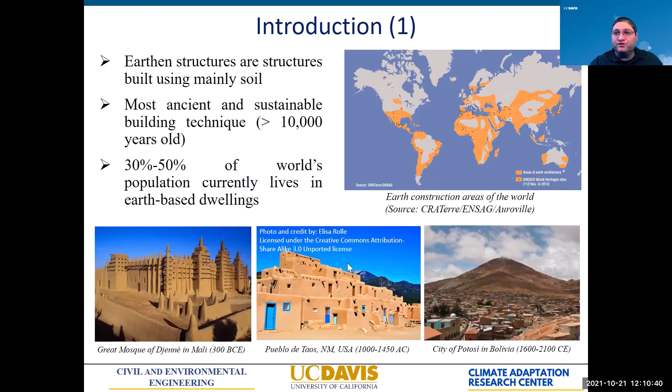Visible. I guess you didn't miss a lot, there were just a lot of words before, so I'll start from here. These are some examples of relevant historical places that are built with earthen construction. Even now, it is estimated that about 30 to 50% of the world population lives in earth-based dwellings. The difference between these type of structures and what we are trying to do is that we are using engineering principles to design these structures according to safety requirements that are typical of modern construction and design codes.

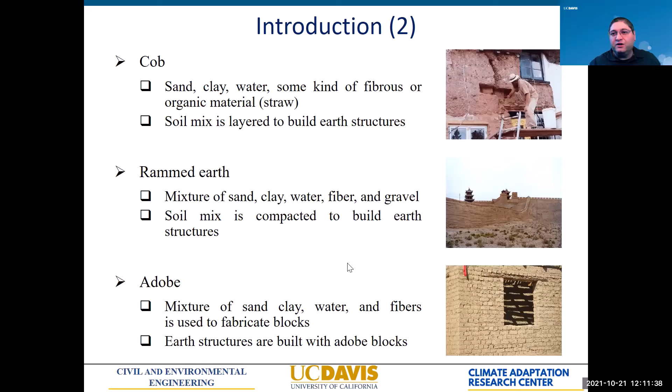So there are three main technologies in earthen construction. One is cob, also called monolithic adobe. This is when soil is mixed with fibers, usually natural fibers like straw, and water, and then it is layered in order to build these walls. Rammed earth is a different flavor where the material is put between containers and then rammed into the right consistency from the outside. And then adobe, which really includes any type of brick construction, is when sand, clay, and water are used to make blocks that then are put together using masonry type construction technologies.

So why are we looking at this very old technology for a problem that is very modern? The major reason is this is a material that is affordable, locally appropriate, and widely available. I'm not going to enter too much into the details, but with the right proportion of sand, silt, and clay, which are the main components, it's possible to use this material for construction purposes almost everywhere. And if we use a chemical stabilizer, generally cement or lime, we can expand even more where this material can be found and used for construction.

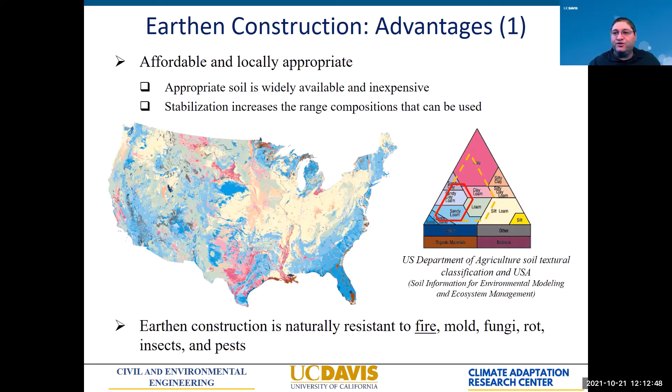In addition, soil and earthen construction are naturally resistant to fire, to mold, to rot, insects, pests, termites. So it's a very durable type of material. It is also healthy and natural. It has the property of maintaining naturally the indoor humidity within the goal of 40 to 60%, which is considered the optimal range for human health.

It does not produce any volatile organic compounds that could be dangerous for health. And it is eco-efficient and sustainable, both from the point of view of operational energy, as it can reduce costs in heating and cooling by 30 to 70%, depending on the climate, and from the point of view of embodied energy, as not being affected by any firing, it uses very little energy.

I see a hand up, Anna. Yeah, I was just curious, obviously I'm sitting in Tahoe City, California, where the snow load is the critical factor for engineering structures up here. I'm just wondering if you're going to talk about the engineering, and whether this is really something that, for my area, is actually realistic.

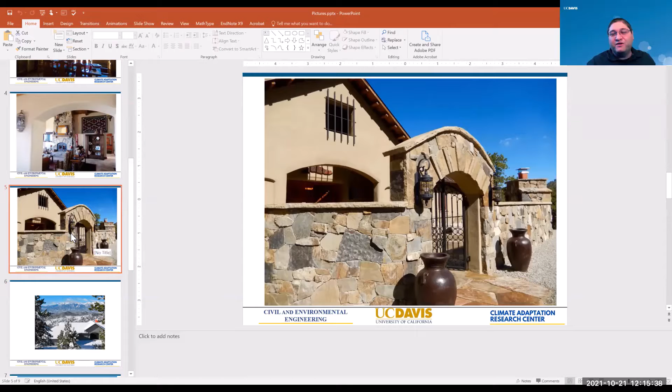So yes, if you design it correctly, like in this case, you can use these houses. It's another point that I wanted to make: this is now a pretty high level house, relatively expensive. But the work that we are doing is to really make it possible for everybody to use these houses.

Going a little bit back to what I wanted to present: one of the issues with earthen construction is that it is used for very high level mansions, of the order of a few million dollars. An example is the house that Will Smith has in Calabasas, a multi-million-dollar mansion made of adobe. And then it is used for very low income or no income people, for example, in Haiti.

But even here in the United States, I'm collaborating with a program for people that are homeless, designed to provide tiny homes to homeless people and create a virtuous circle of new economy, with people that get the house, then start working, and then start producing for the economy.

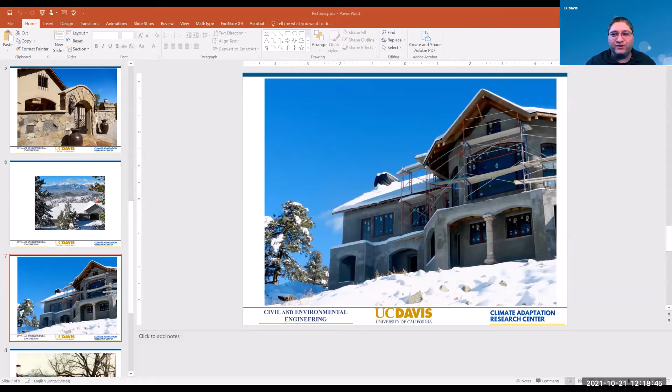Anna, does that respond to your question? Thank you, I think it does.

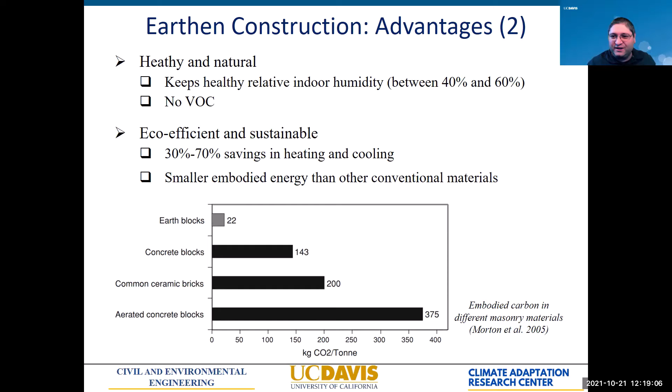So I'm going back to the presentation, but please feel free to stop me anytime. And if we go beyond, and there is something that I cannot present because of time limit, it's not a problem.

Another advantage of earthen construction is that, once properly designed, we have proved it can provide good resistance to hurricanes, tornadoes, and earthquakes. And now we are investigating the performance under wildfires, which I will address toward the end of my presentation.

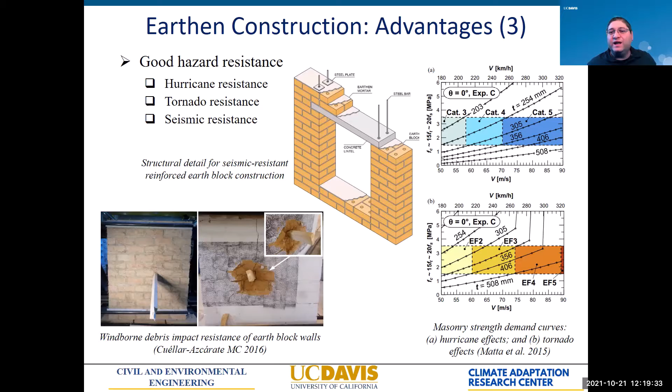So there are also challenges that we have to resolve when designing with these. One of the challenges is that soil is a natural material and thus has a higher variability in terms of properties than other industrial materials. That's something that needs to be taken into account.

It has generally poor durability against wet climates if nothing is done to remove that. Here you can see a test that was run on a rammed earth wall that was exposed to an accelerated test of

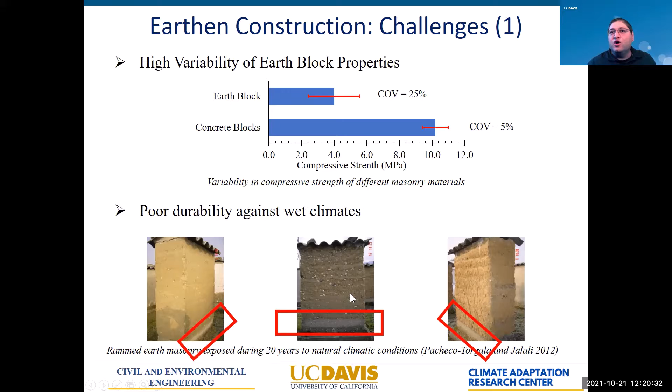wetting and drying cycles where there is some damage at the base of the wall. Another issue is that the material by itself is brittle, which means that when you load it, it reaches its maximum strength and then it breaks in a fragile manner, similar to concrete in a certain way, or to rocks, or a piece of chalk that seems like it's not deforming until it breaks completely.

It is also labor intensive, and this usually brings up the cost in places where labor is more expensive.

I see there is a question in the chat from Ian: can you give examples of California jurisdictions that have building standards specifically adopted for earthen construction?

This is really relative to building codes. The earthen construction codes that exist right now are the New Mexico building code—I believe title 14 of the New Mexico administrative code, which is for building earthen construction. Then there is chapter 21, section 2109 of the International Building Code 2019, which has been adopted by the California Building Code. So if you look at the California Building Code, section 2109 is on adobe constructions.

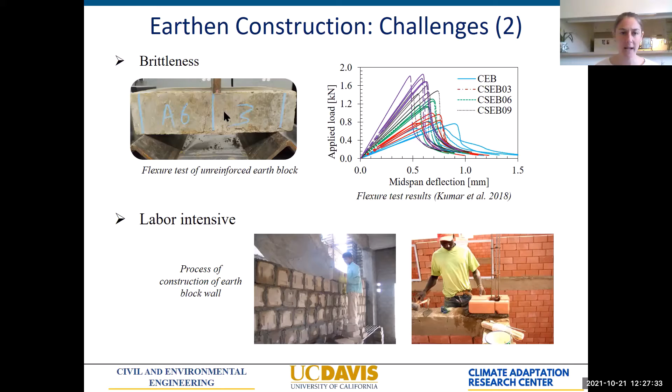Let me continue with the challenges. We have a lack of engineering-based design codes. All that's available is the New Mexico Administrative Code, the International Building Code's Empirical Design provisions, and the International Residential Code. We need education among engineers and architects, which I already went through.

There is also another problem: the widespread perception that this is a substandard choice due to poor performance of non-engineered earthen structures in other places in the world. I'm thinking particularly of things that happened less than 10 years ago in places like Turkey, where after a strong earthquake, more than 10,000 earthen houses had very bad performance.

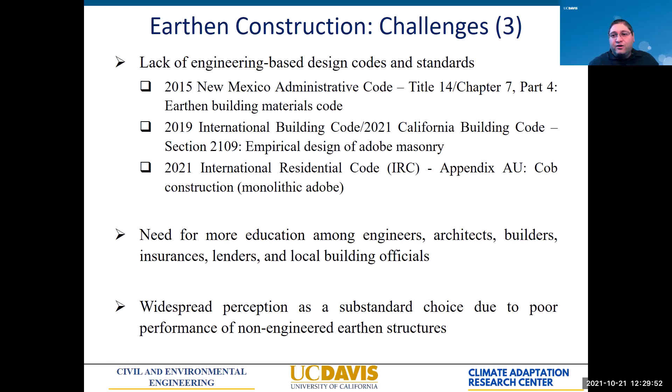Our work is developing the engineering knowledge needed so that we can design these structures like all other more modern materials. And when that is done, you obtain very nice, beautiful looking, but also very resistant and safe structures.

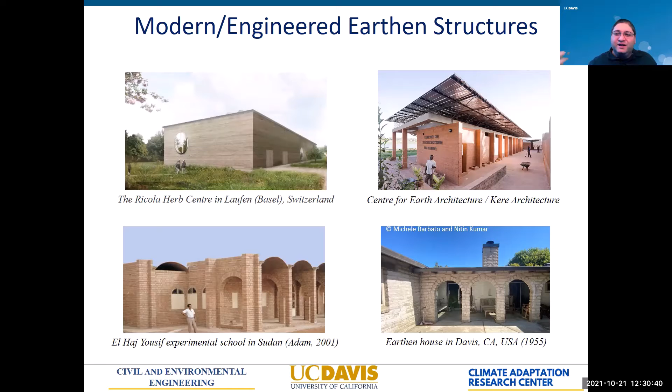These are examples coming from Switzerland, from Africa. Here, I visited just a few months ago a beautiful earthen house built in Southern Davis in 1955—a house you would never guess is 70 years old because it's in very good structural condition. So it is feasible, it is possible, but we are not doing it for all of the other ancillary reasons behind it.

I want to focus now more on our type of construction, the earth block, using blocks made with soil. I won't go into the different details, but the one we are investigating is called compressed and stabilized earth blocks, because we add a chemical stabilizer like lime or cement, then compress them mechanically to build the blocks and achieve better strength and durability.

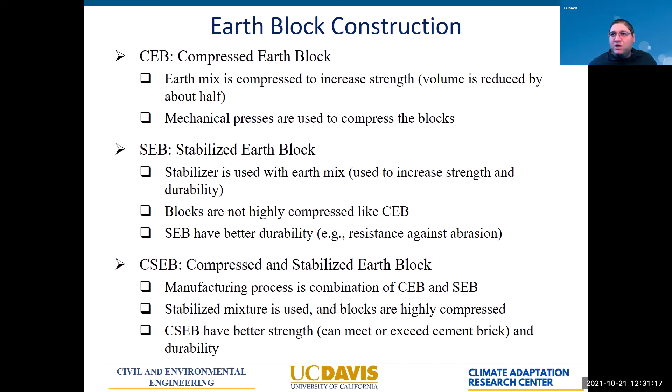These are types of blocks we can build with different molds. This is an example of our students making one of these blocks with a machine we built ourselves in the lab when we started this type of research.

While you can see this is quite laborious, we just bought a hydraulic machine that does this in a much easier manner. All we need to do is load the soil into the cart, and the cart automatically sends it into the machine at the right speed—we can produce about 300 blocks per hour with a crew of 3 people using this machine.

So much faster, much easier, much quicker.

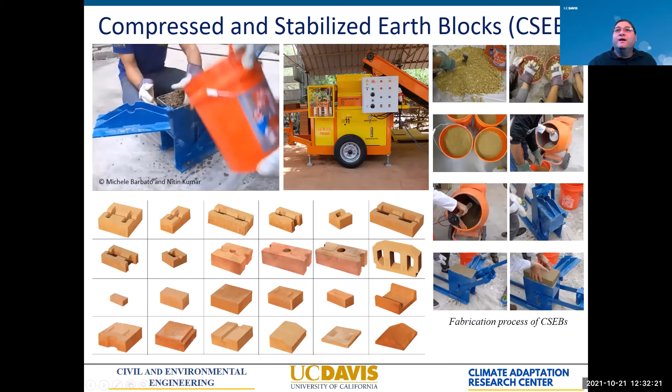Now some studies on feasibility that will also connect with the question posed about costs. We investigated the feasibility of this type of structure in Louisiana, where we looked at affordable hurricane-resistant housing for people living in temporary houses, displaced by hurricanes, or living in trailer homes. More than 350,000 households in Louisiana were in need of affordable housing after Hurricane Katrina, and we were trying to find a solution for that.

In addition, in Louisiana we had a lot of different challenges: poor soil quality that needs amelioration and stabilization, hot and wet weather which produces durability problems, and strong wind loads coming from hurricanes. All of that needed to be addressed in a very cost-effective way, otherwise it could not be used.

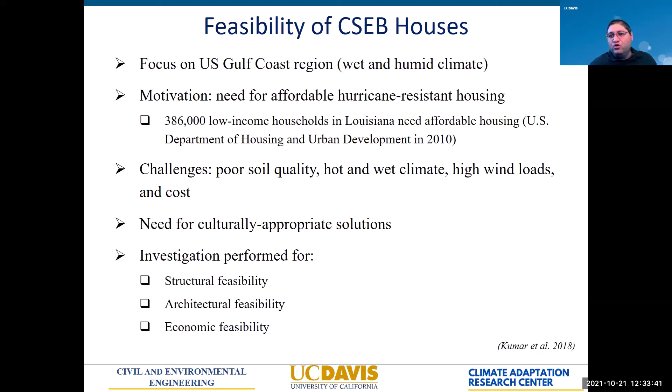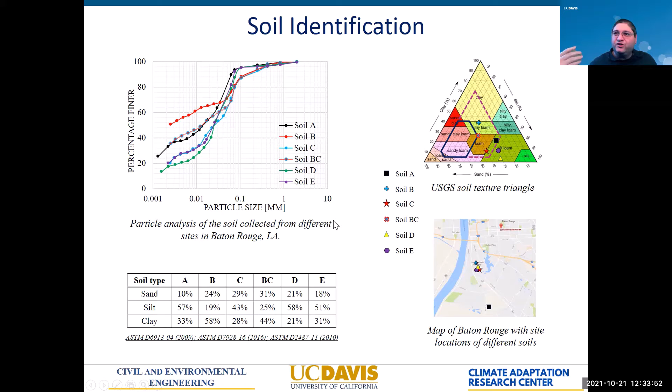We investigated the problem from a structural point of view, an architectural point of view, and an economic point of view. I won't go into all the details, but we took soil available around the LSU campus, normal soil, and investigated the mechanical properties in terms of compression and flexure to identify the amount of cement needed for appropriate strength for construction.

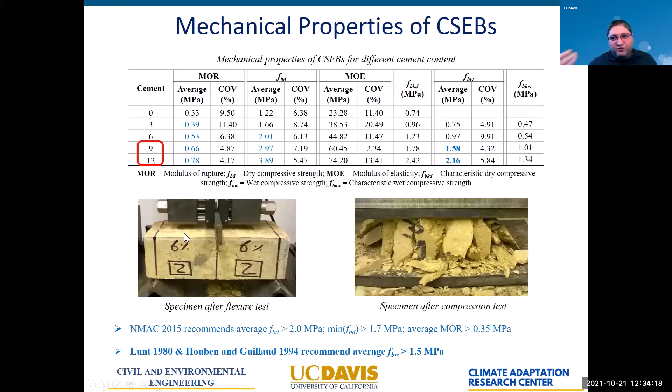We found that we needed between 9 and 12% addition of cement for that specific soil we were using.

We wanted to address immediately the problem of durability, because in Louisiana this type of construction is not being used a lot, since water and rain tend to wash out soil. So we did an investigation with a wall left outside the campus for 6 months, where we protected half of the wall using a stucco made with soil and cement at the same 6% composition we're using for the blocks. As expected, the side left without protection from the water during those 6 months—during which, by the way, 2 tropical storms passed through Baton Rouge—started having a severe problem after just a few months, because the mortar is washed away by the rain.

But the other side doesn't show any problem. Not only that, but after this test we demolished the wall, took all of the bricks, and tested them again. We found that on the side that was protected, the bricks were getting stronger and stronger, because the hydration of the cement was continuing due to the presence of all that water. So the structure was actually becoming stronger with time, not weaker, unlike on the unprotected side.

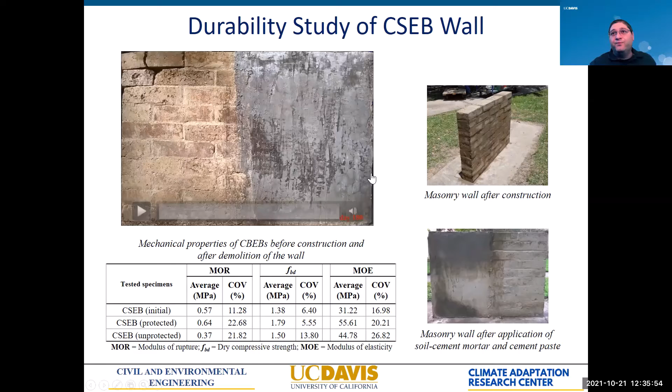We did our engineering analysis to find the design needed to take the wind loads required by ASCE 7, the code used for design of structures. Very quickly, the design was done by developing these curves—the intersection of these curves with the vertical curves gives us the thickness of the wall needed to provide sufficient strength against hurricane winds. We were able to do it with our blocks at 30 centimeters thickness, even in places expected to have very high wind speeds.

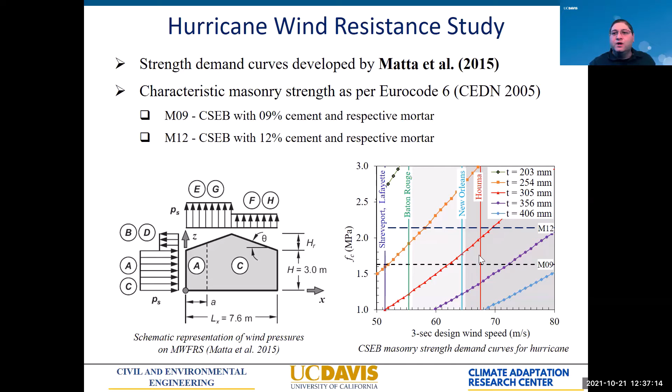I apologize if everything is in international units, because that's what publications want for the data. But we're talking about 12 inch thickness walls for Hurricane 5 resistance without the need of reinforcement. And with reinforcement, we can bring that thickness down to between 8 and 10 inches.

We also tested these materials against windborne debris impact. As you can see, the 2x4 tested with the wind cannon goes through it like a hot knife through butter, leaving this very scary hole in the wall.

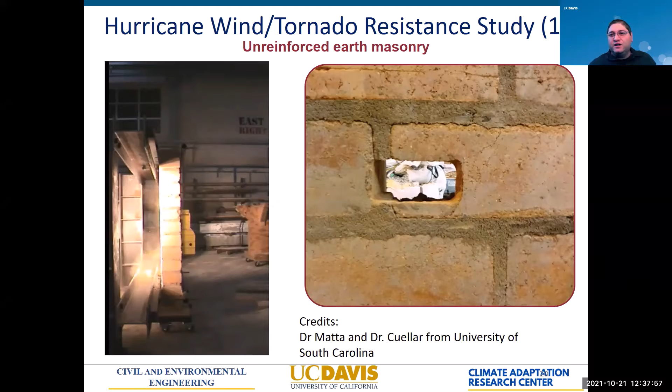So what we did was add fibers, specifically recycled plastic fibers obtained by shredding plastic bottles, into the composition. So the wall is able to stop the missile—not only that, but the impact is still so strong that the missile breaks without penetrating the wall. Again, there is a technical problem, but we can find a technical solution to it.

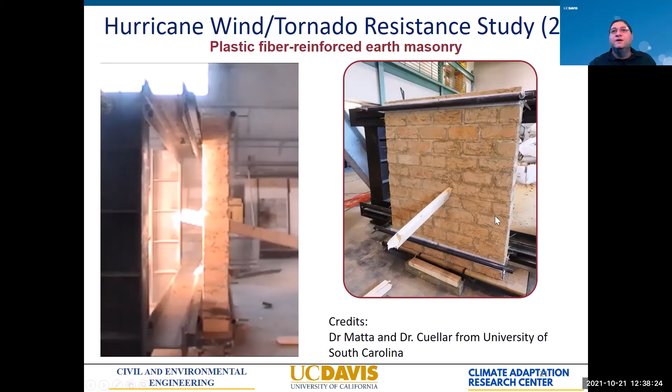This is the slide relative to economic feasibility. In order to reduce the amount of labor needed, we have a big advantage in terms of material cost, because the material is fundamentally free—it's the soil that we have under our feet. The idea is you want to use that, minimize the amount of transportation, and minimize the amount of other things that need to be used.

This is also great considering what happened with the disruption of the timber supply chains lately, where the cost of timber skyrocketed for almost a year, blocking a lot of new constructions. This soil is locally available, it's natural, so there's no disruption of supply chains that will change the cost of the material. We did this analysis with the cost of labor in Louisiana, and we were able to develop a construction technique based on mortarless interlocking compressed and stabilized earth blocks that reduces the amount of labor almost by a factor of 2.

Under these new parameters, we were actually able to design a house whose cost would be lower than the cost of an equivalent approximately 1,000 square foot house in southern Louisiana, which responds to part of the question about overall cost that Anna was posing.

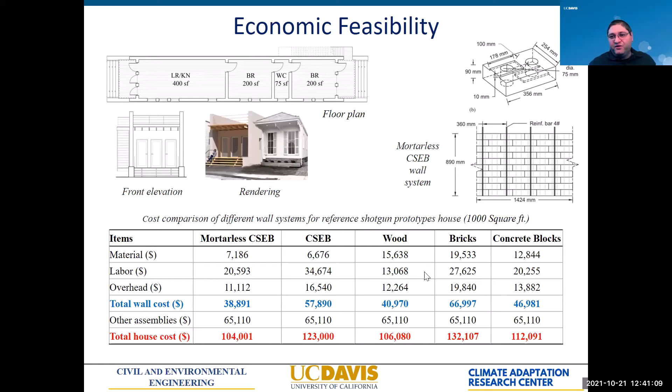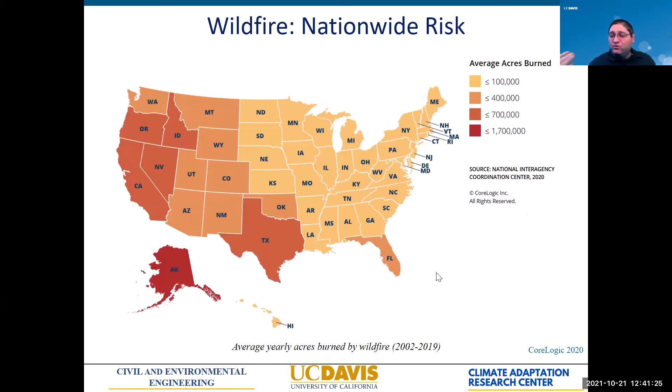As I promised at the beginning, I want to talk about wildfire. I don't need to discuss too much about how dangerous and how much risk we associate with wildfires. We can see what is happening in California. The number of structures damaged or destroyed by wildfire is increasing, I would say, exponentially. The number of confirmed loss of life is extremely well correlated, unfortunately, with the loss of houses, much more correlated than with the acres burned of a wildfire.

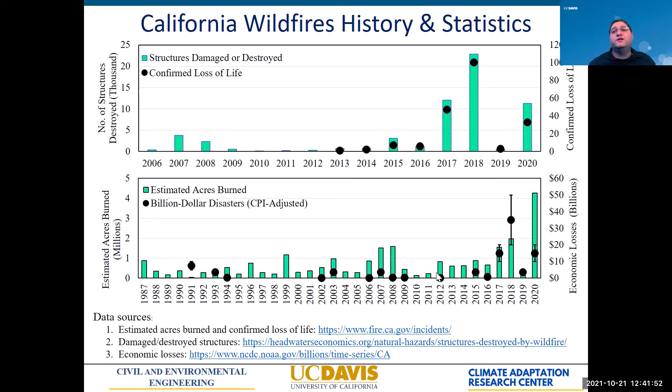The issue is that we are having a double whammy in terms of wildfires. On one side, the hazard is increasing because of climate change—drier seasons, longer wildfire seasons, higher hazard connected with large wildfires. And we are also increasing our vulnerability because we are building more in the wildland urban interface. So your risk is really increasing due to the hazard and the vulnerability, and risk is the product of the two. So we need to do something about it.

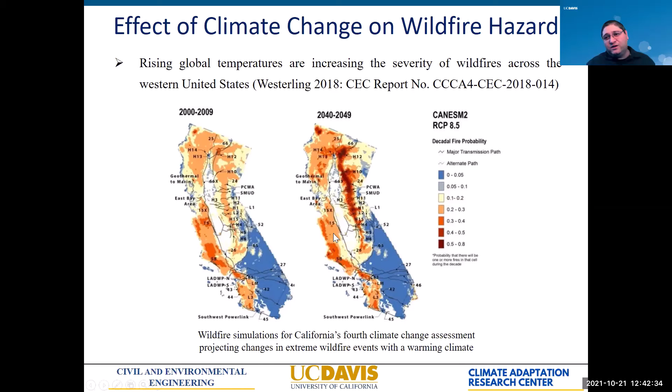What we are doing right now is developing standards that make structures ignition resistant, meaning it's difficult for a structure to start burning. Everybody considers the cost of a fireproof or fire-resistant house too high to be taken, and that's assuming the only solution is building a house made of concrete or concrete blocks. But using soil, we can actually bring down the cost so that the two costs are comparable.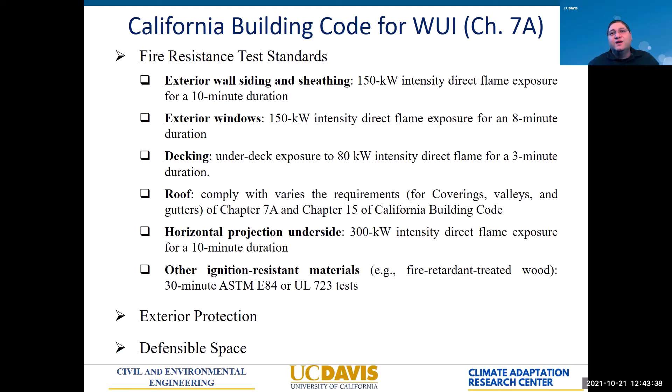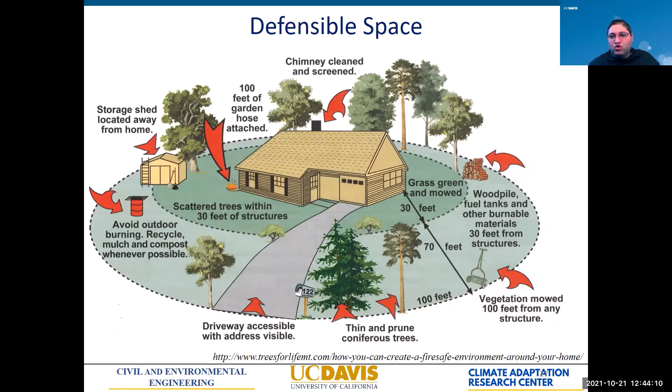I'm sure you are very familiar with all of these, and with the concept of defensible space, with three different regions—two that are actually mandated by law, and one currently under development, the so-called Zone 0, which is 5 feet around your house where everything should be non-combustible and far from the house. Then there is Zone 1 and Zone 2, which involve reduction or removal of fuel load. So we are trying to use this material so that the house itself does not burn.

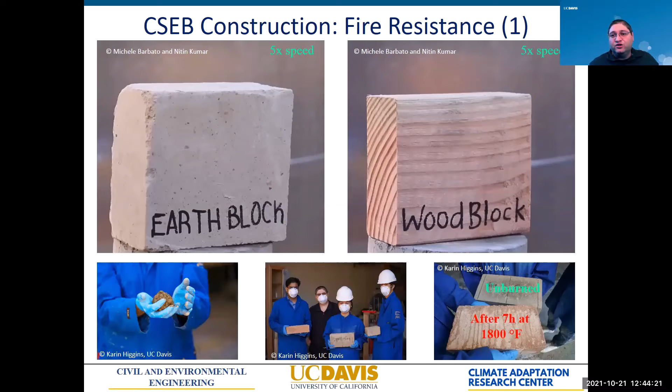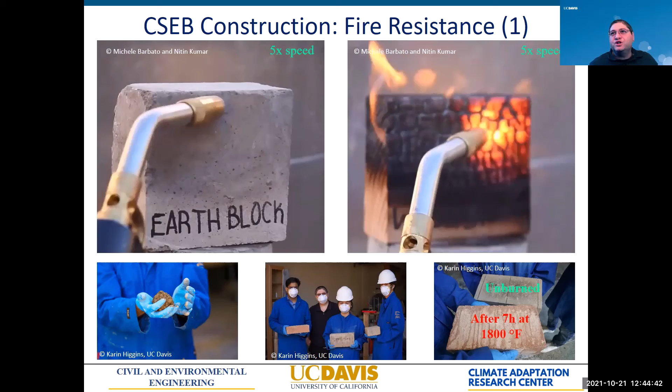We did some preliminary tests—this is really more for showing than for data—where we are hitting the earth block we are building and a typical 2x4 used in construction with a propane torch at 3400 Fahrenheit. You can see the difference in performance. On one side, the wood is completely torched, burned, and charred. On the other side, all you see is a little change in the color of the material.

We have done tests that are more scientifically based, heating our blocks for different times and at different temperatures. These are two blocks—one as produced, and one after 7 hours in a furnace at 1800 Fahrenheit. Our preliminary results show that up to a certain temperature, the blocks become stronger, because the wildfire produces the effect you'd get in a kiln, firing this material into fired clay blocks instead of unfired clay blocks.

Up to about 1800 Fahrenheit, our blocks are performing well. With temperatures going above 2200 Fahrenheit, you start seeing a reduction in the strength of the materials and production of microcracks. If you keep increasing the temperature, you reach a point where the material glassifies and then melts, but that's kind of expected. Anyway, the temperatures reached in wildfires are rarely above 2000 Fahrenheit, and definitely not for 7 continuous hours at that temperature.

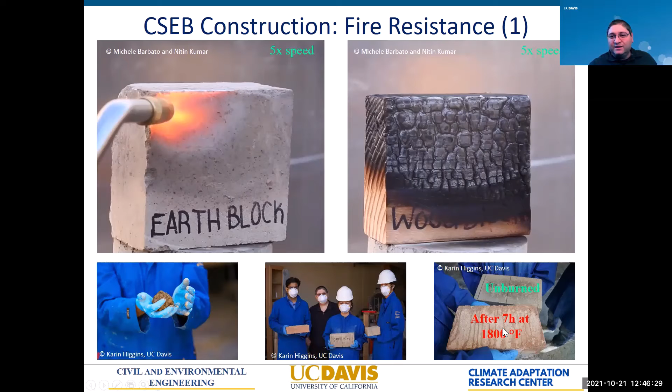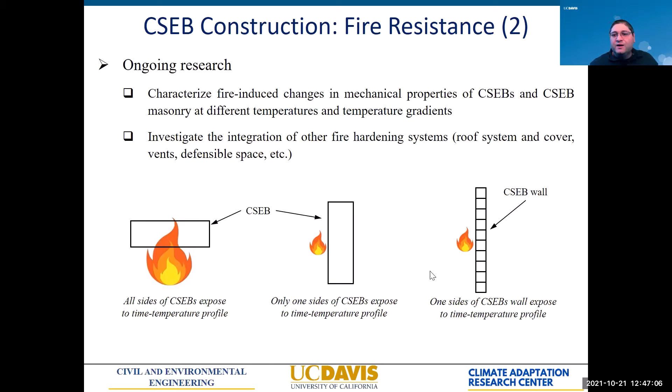We are doing additional research, checking what happens to these blocks at different temperatures and then testing them in compression, flexure, and durability. We want to test also what happens with a differential temperature, and then we will end up testing a wall where one side is exposed to the time-temperature profile in the code, and then subjected to the thermal shock produced by a hose of water typically used by firefighters.

Some other considerations: when you look at the embodied energy of a light frame wooden house and an earth block house, it may seem the two types of construction are equivalent. However, that equation changes a lot once the wooden house burns, because the CO2 production from a burning house, without even considering the toxic material that burns with it, makes it much more similar to the emissions of a concrete block house than an earth block house. So there's an additional component in terms of greenhouse gas emissions that should be taken into account when designing these different types of structures.

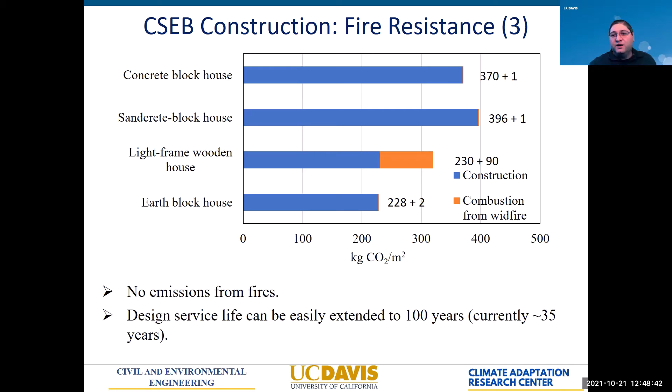Finally, a house built correctly with soil can easily have a 100 year design service life. That's in contrast to wooden houses, which generally have a design life of 30 to 50 years, at least nominally. But in reality, the average design life before the cost of renewing the house becomes too high is around 35 years for a normal light-framed wood house.

I'd like to wrap up, as I think I'm beyond my time, but there are some initiatives using this type of construction for the greater good. The Good Earth Lodge was an initiative for the Crow tribe in Montana, where the tribe developed the plant and built houses for members of the tribe.

There's a program running in Scottsdale, Arizona, called Brick by Brick, where homeless people help each other by building tiny homes to reduce the problem of homelessness.

And there's a program in Haiti called Welcome Home Haiti, where they developed a plant for building bricks, and they're building churches and schools. They've built more than 700 new houses for people who were homeless or living in dwellings that have difficulty being called a home. They're also giving jobs to 100 people in the community, renewing completely the outcomes for that community.

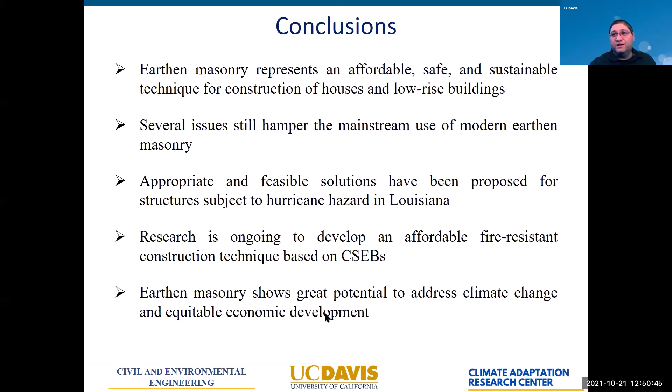I don't know if I really need to go through this conclusion, but fundamentally, earthen masonry has the capability to be an affordable, safe, and sustainable technique for constructing houses and low-rise buildings. Considering we're expected to need about 2 billion new homes in the next 60 to 80 years, this is really an important part of our fight to make quality of life better while ensuring the sustainability of what we're building.